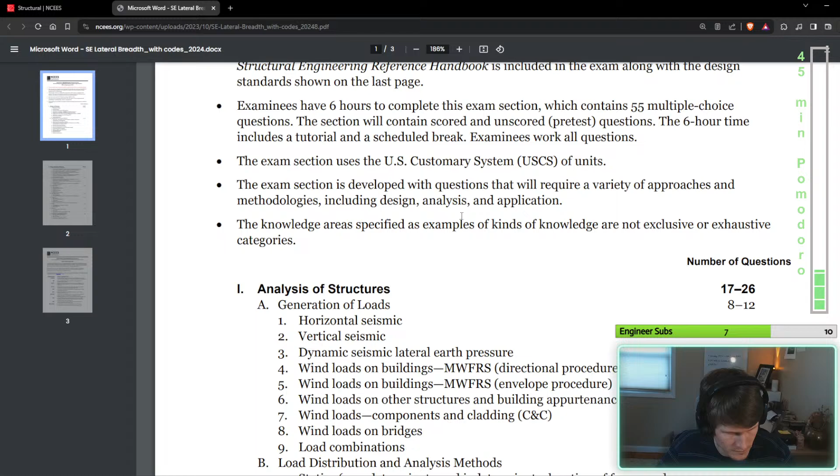I get you, Dennis, I get you. Let's just make sure, I always want to make sure I got the right codes going. 2018 for lateral, 2015 for the provisions. Okay, beautiful. Okay, just want to make sure.

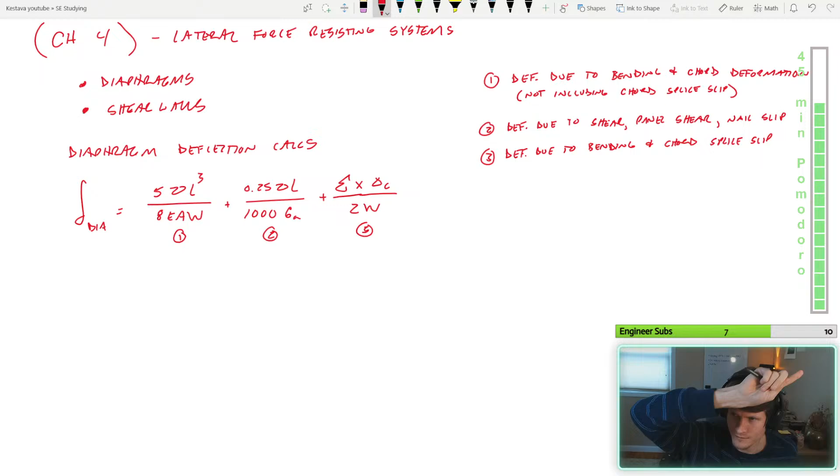So alright, let's get back into it. We got a little bit more time. No, I'm not looking at the subscribers, I'm looking at our Pomodoro 45 minutes. So let's stay locked in a couple more minutes.

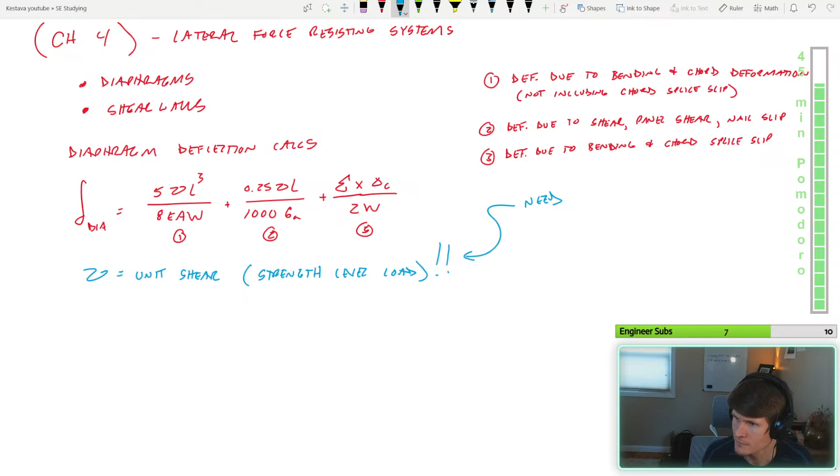What's Copilot? What is Copilot? All right, sorry, quick tangent - what the heck is Copilot?

Oh, like Microsoft Copilot? Is that what I'm seeing right now? This guy, this AI companion? What is this? Ask me anything - is this like their ChatGPT?

Look at this. Yeah, that's exactly what I'm thinking, Nicholas. Look at it go, look at it go. It throws in some emojis. Freaking, let's go. No shit.

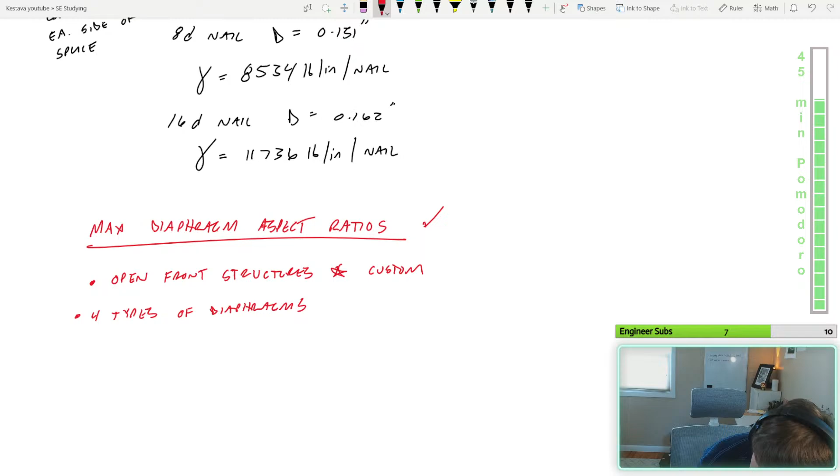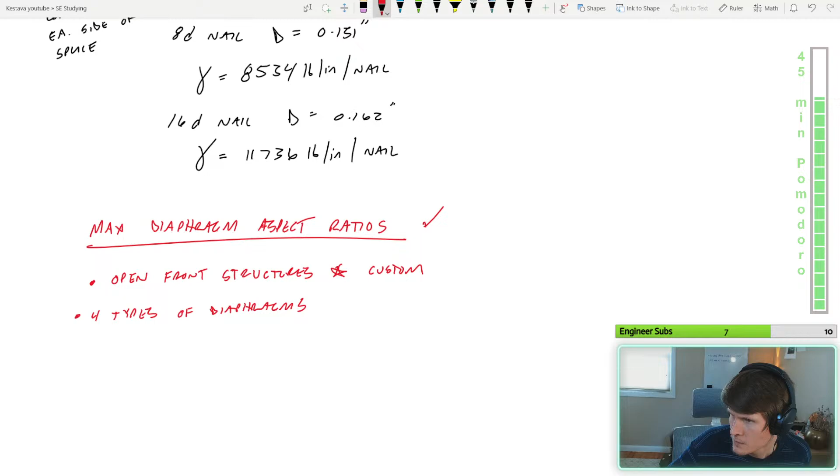See what's going on, what's going on. Oh yep, you caught me - yes, the double top plate. I almost took the full section. No, no, no, you can only get one. Good catch there, that took me a hot sec to just pick up on that.

What else you got? Most commonly, plate splice is achieved with 10D nails, 2.5 inches long. Wouldn't you have to take some reduction for the 3.5 inch 16D nails? Let's see.

Yes, I mean, if we did 10Ds, then this value would change. So I did 8D to see what the value is, and then I did 16D to see what the value is, and this load-slip modulus variable is dependent upon the diameter of your fastener at the splice. So if I did 10D, that would be - let's see.

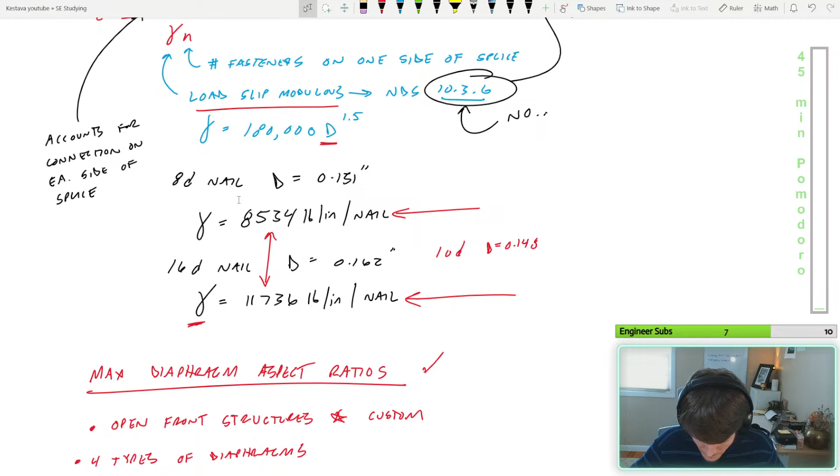So like, we need this value, number of fasteners that you've designed for. I get what you're saying because you penetrate, but it's based on nail slip. So I'm thinking that because of that, you're not getting any reduction because your nail fully penetrated your chord. Because you still have, it's based on the diameter, so you still have that diameter running completely through your chord connection. So you don't have to take any loss because your fastener penetrated the full way.

I'd almost say the opposite. If your fastener wasn't long enough, do you then, well, and I guess it doesn't really matter. I mean, it matters, that's going to come into effect when you're designing your splice for the shear capacity. But for the deflection portion of the calculation, they're telling me it's just dependent upon the diameter of your fastener and then the number of your fasteners.

So I guess that's where I would rationalize to myself to say, as long as you designed your splice to be able to handle a lesser embedment or a greater embedment, then that part's checked off, and then this part is just, okay, what's the diameter of the fastener? Move on, let's keep going. That's my only take though.

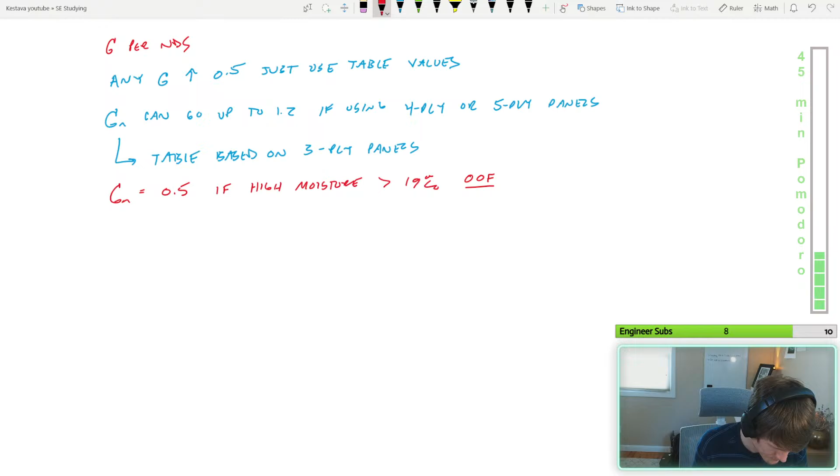All right, I think I'm gonna end it there. What is up with Jose? Man, what is up with Jose? Raymond, that's the question we're all trying to figure out. Maybe one day he's gonna graduate, move on, get out of here. But for right now, I think he's already graduated, but he's just too obsessed with structural engineering, so he hangs around.

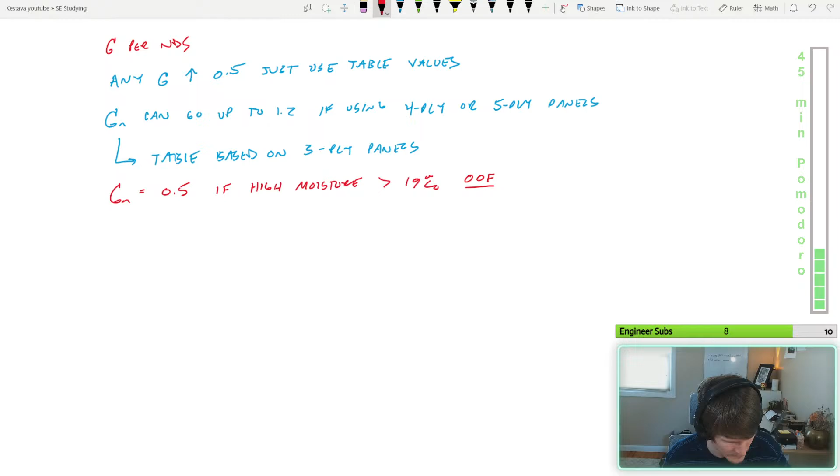I think we're at a great spot to wrap up. I just finished diaphragms. We did a little out of plane very briefly at the beginning there, pretty straightforward, and then we kind of just churned through diaphragms, deflection and strength. Yeah, I got a little more involved with deflection than I had in the past, so that was good. And I'm feeling good, we're feeling good. Now I'm staring at shear walls, so next time I might be doing it solo, but I might be back here knocking shear walls out. The only thing technically with diaphragms I haven't done that blends with it is the sub-diaphragm analysis. So technically not done with diaphragms, but done with basic diaphragms. I'm gonna keep sub-diaphragm as its own little separate task. And shear walls, we'll knock out the different types of shear walls.

That includes the type of shear wall, the strength of the shear wall, and the displacement of the shear wall. So those couple things, just like a diaphragm—the only thing that's missing is that you have a couple of different parameters that you can do for your type of shear wall. So that'll be good, but we'll brush up on that quickly.

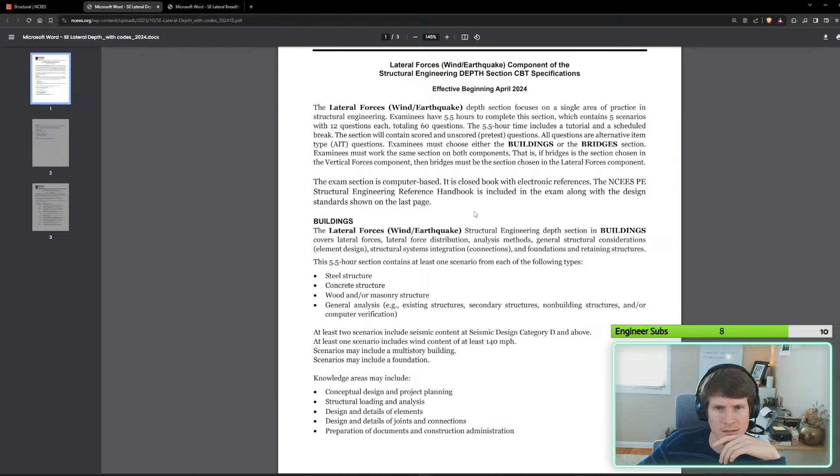Computer-based. It's closed book with electronic references. It's included with the exam along with the design standards shown on the last page. Okay. Buildings or bridges. All questions are alternative item type.

What the hell is that?

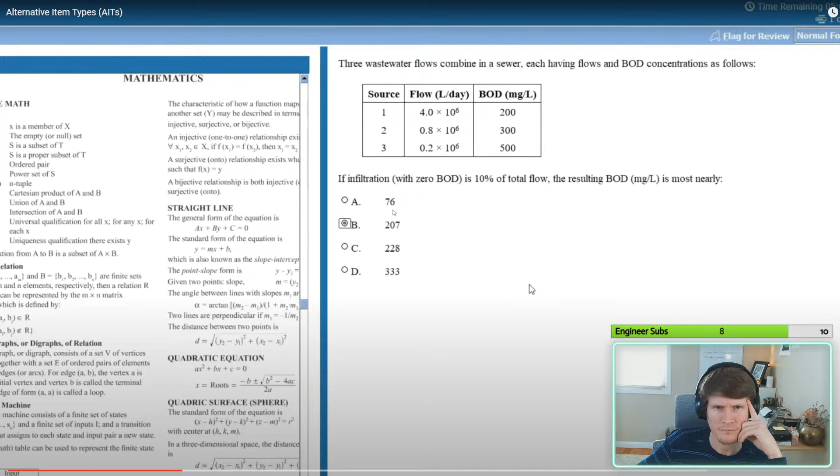Examinees taking a computer-based NCEES exam may see up to 5 types of questions on their exam. The question types include traditional multiple choice questions that feature 4 answer options from which to choose, one of which is the correct answer. Multiple choice questions with multiple correct options feature more than 4 answer options from which to choose and allow for multiple answer options to be selected.

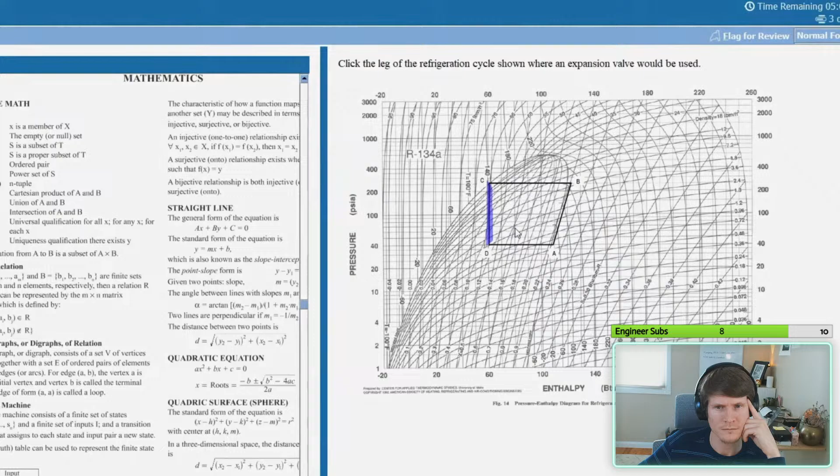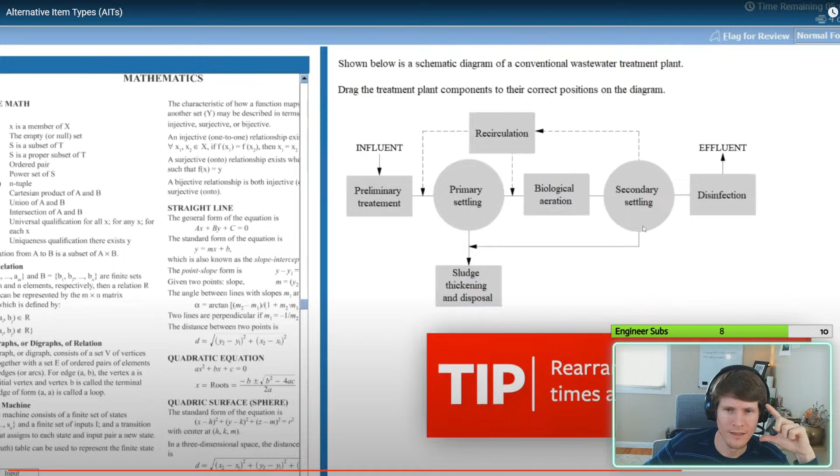Point-and-click questions require you to select one or more predetermined clickable areas that become visible when you move your cursor over the graphic. Drag and drop questions require you to click and drag your answer options to sort, rank, match, or label a provided graphic. Fill-in-the-blank questions require you to enter your response instead of choosing it from a list of answer options.

So I guess that's what's going down. No more breadth exam. Civil Engineering Academy, get it, get up out of here right now. He's actually got some great information if you're ever curious. He goes much more in depth about the information on the exam.

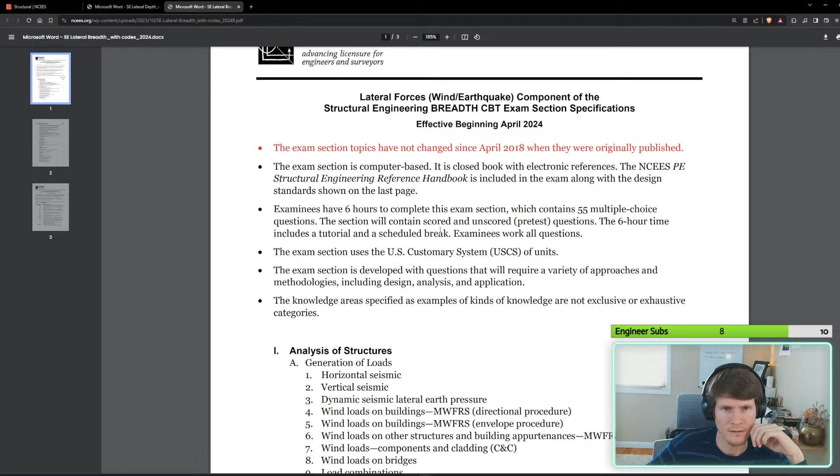Is it like that for the lateral breadth? Oh wait a minute. Examinees have 6 hours to complete this exam. 55 questions. Scored and unscored. The 6 hour time includes tutorial, scheduled break.

Okay, because you got a break in there again. Silliness. The exam section uses the US customary system. Where's the... Oh, 55 multiple choice questions. I didn't see them specifically say, like they do here, the alternative item type questions.

So it looks like the afternoon gives you more variety. Still kind of weird because I'm used to the essay style questions, but I guess in the grand scheme of things, the essay style questions really did just kind of break down to asking you 5 or 6 things, but it was open response.

Frankly, I'm taking the morning portion now that they split it up into 2. Early April is when I'm allowed to. April 1st and onward is when I'm allowed to sit for it, so I'm going to do that then. I thought I could take it any time in 2024, but it starts April 1st, so I was going to take it beginning of March, but I just get an extra month to study, so that's fine. And then I want to roll right into sitting for the afternoon portion in mid-April. So that's the plan, we just keep on keeping on.

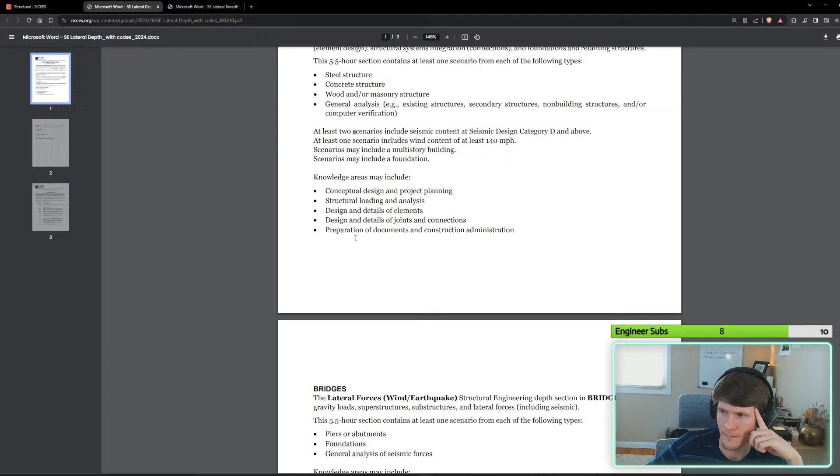Okay, wind, high wind scenario may include multi-story buildings. Yep, may include foundation, okay. Category D. Category D is... yeah, that looks good, that'll do. She'll do.

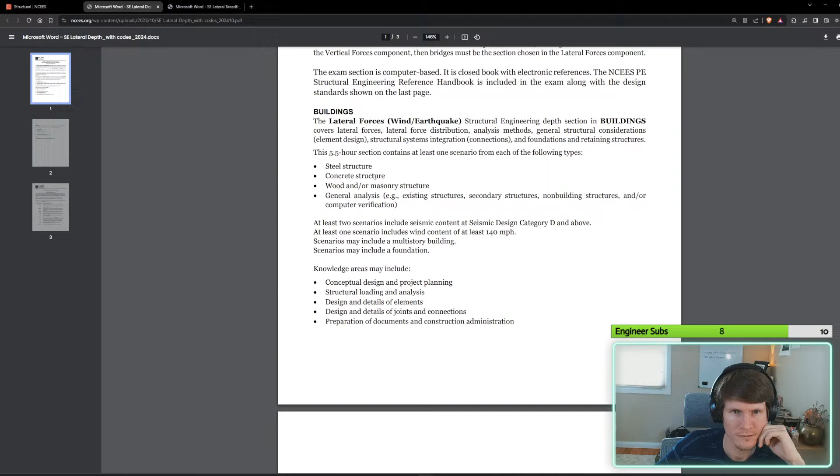Oh, bridges, oh, buildings, oh that's it? That's what they tell you? Yeah, right? Yeah, there you go. Yeah, 1% seismic weight, moving on. See you later, hey, see you later.

I flagged that in an early video on my channel - attention, there are two sections in chapter 12 you need to be careful of. There's the seismic design category A section, which is simplified and super basic, but it looks identical to the actual design provision for anything above seismic design category A, and they're right next to each other. So don't accidentally flip to that page and think you're in the right spot.

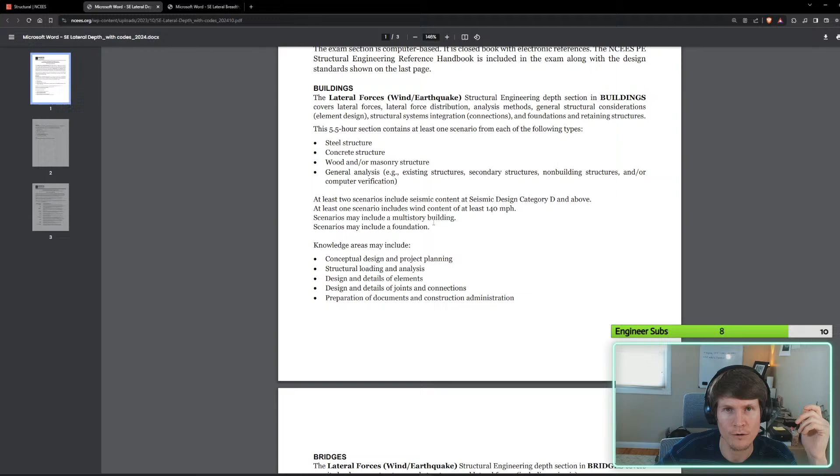It just seems wrong. Design category A, take Massachusetts for example - I'm pretty sure that's A. I don't think there's ever been an earthquake in history there. So why even design for it? But it's like, okay, if it's not happening, or if it does happen, nothing's gonna shake. So yeah, designed for absolute minimums.

It's all about playing that probability game. Okay, so I mean, all of the potential content is the same.

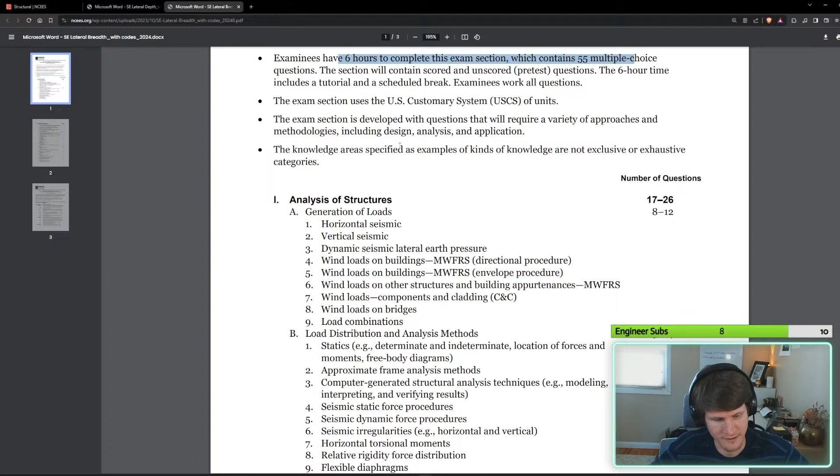Bridges, okay. That's interesting. Whereas in the breadth exam they hit you with that, you know, like, okay - yeah, analysis of structures. Design and detailing is the other half.

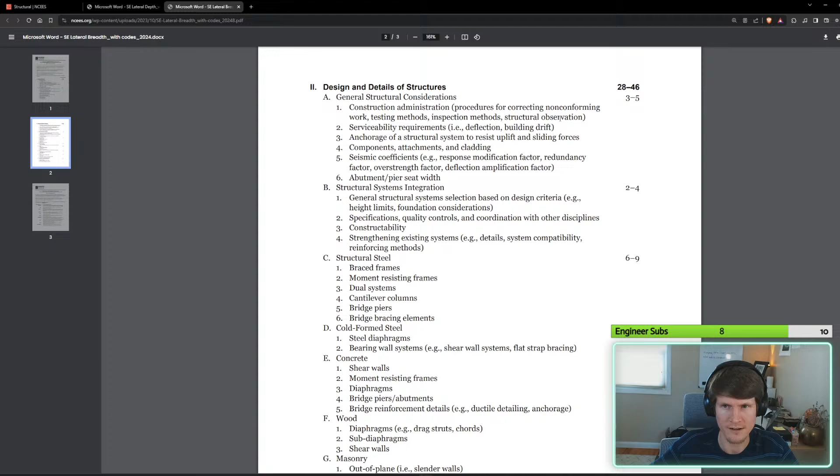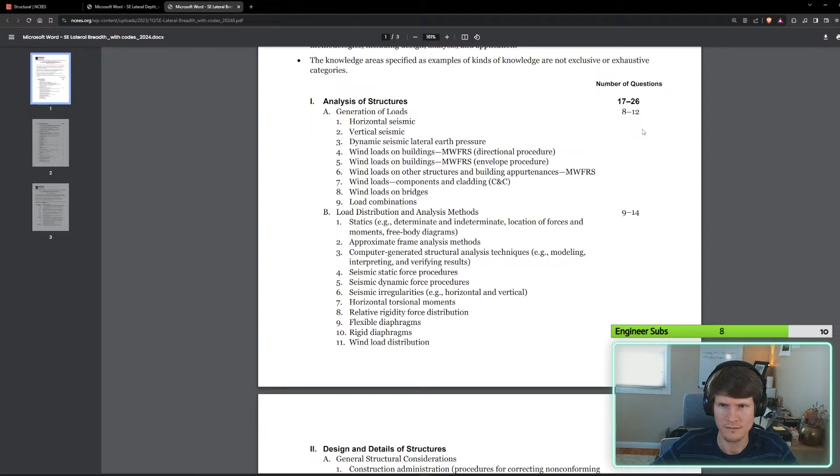Wait a minute, 28 to 46. Why did they say 55, but then they only go - am I missing something? Oh, 28 to 46, 17 to 26. Oh yeah, I get it. I get what's up.

Okay. Load distribution. Height limits, foundation.

To be quite frank, I had as good a time as you can have taking one of these exams in the morning. I thought the questions were great, like questions to get the juices flowing and move through and make sure that you get the overall concept of the gotchas.

within what is allowed for lateral design of structures on a conceptual level. It's not like you're doing these nitty-gritty calculations on everything. It's more high level, schematic level design - like, hey, if we did a building this big, what do we need to watch out for? What are the pitfalls? Which is much more, I mean, really good, what do you want to call it, a skill to have as an engineer - not needing to do the calculations all the way to the end to say oh crap, I have a problem, but to be able to identify them early on.

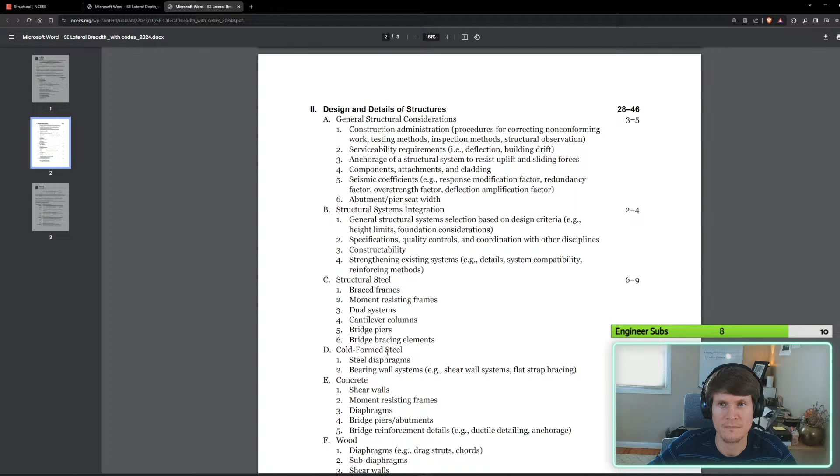I didn't feel like I had the most difficult time. It was still difficult, but I moved through the problems. So I'm gonna focus a little bit more on wind.

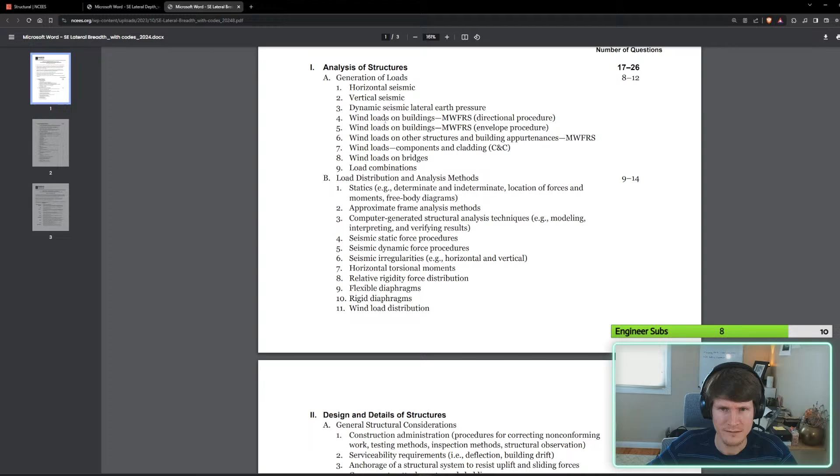I want to lock that in one more time. I think I went a little fast on wind in my early studying. Seismic I'll do a little bit more in a couple of areas, but I'm gonna make sure I know steel and concrete a little bit better. Although concrete, I'm not that far off - it started to click pretty dang good last time. Steel's still a little bit of a mystery for me.

No. Where is this music going? Where are we? No, I can't figure out.

But again, I get the overall concept of steel lateral design and the systems we've used - ductility, capacity-based design of your lateral braces, stuff like that. Your moment frames, whether concrete or steel, it's the same type of design procedure. Your probable moment - the design of the structure is most likely going to be driven by your drift limits rather than strength requirements.

I really started to digest this last time, so I'm excited to get back to those things and just get even more info on them, lock them in, and be an SE. Eventually it's gonna happen. So we're gonna get there and then we're gonna be a damn good one. You best believe, just like everybody in here in this chat.